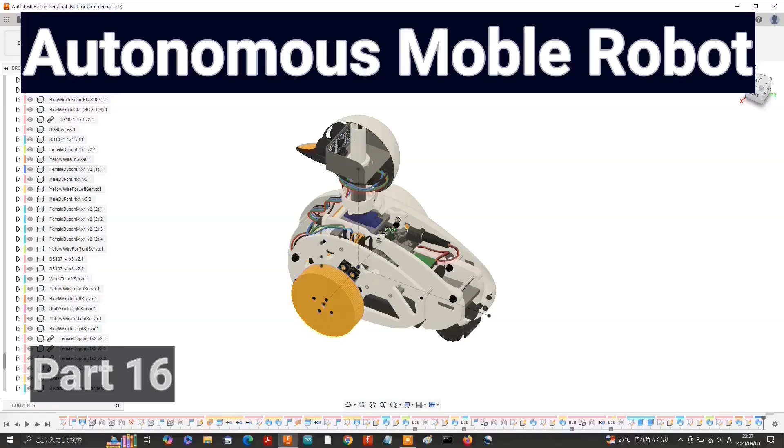Today in part 16 we'll finalize the neck structure. We'll also use the emboss tool to create precise openings.

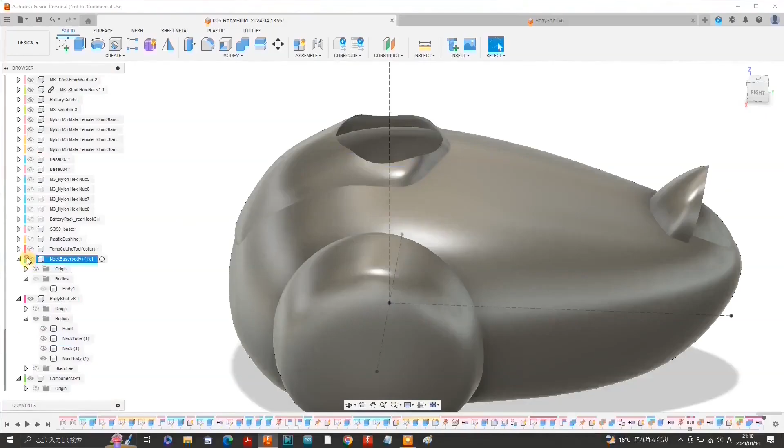Okay, so we might start off by relabeling some of the components because their names might not be so accurate anymore after a number of combining operations. For example, when we hide the component labeled neck base, the entire lower body disappears, so that label will need changing. Also, when we unhide body shell, nothing happens because now only the head and neck components are stored under body shell. Let's unhide the head, the neck, and the neck tube.

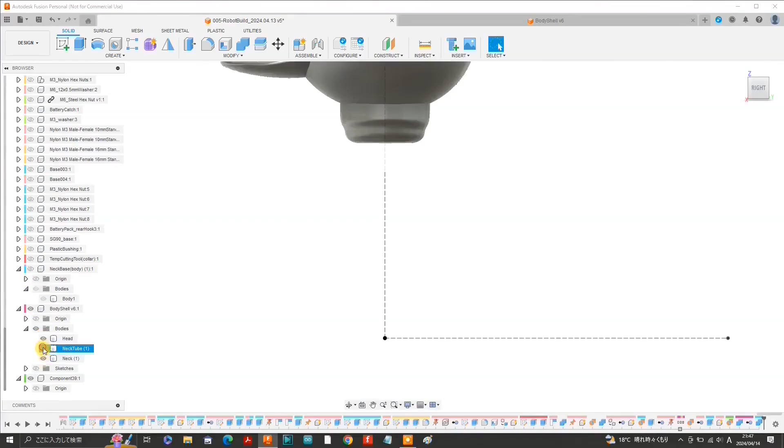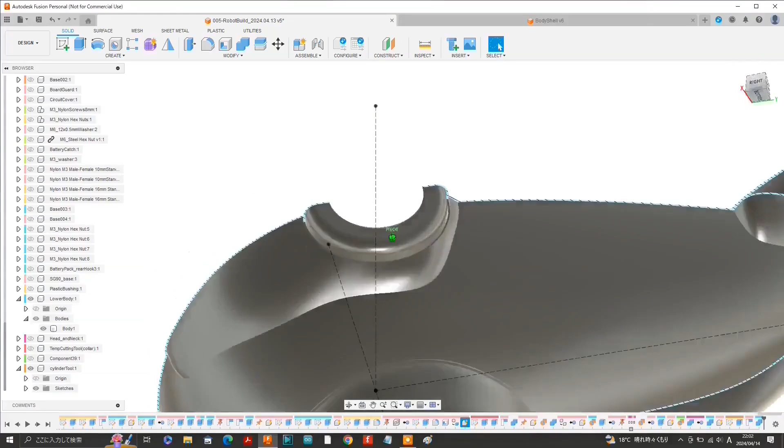Click on body shell and rename this group of components to head and neck. We'll just hide the head and neck for now and unhide the component that is labeled neck base. And let's just rename that to lower body. Here the footage shows a longitudinal section analysis where we can see that the neck base is integrally formed with the lower body shell. Unhide the SG90 micro servo and we can see that the SG90 fits nicely within the neck base.

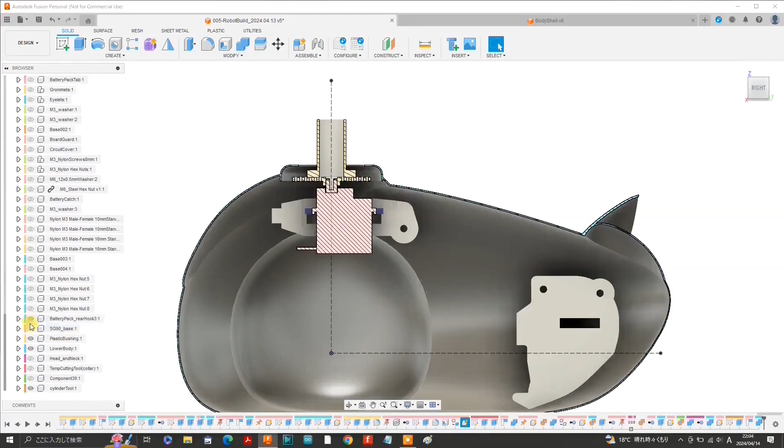Unhide the plastic bushing that is on top of the SG90 servo horn and a few other components like the SG90 base and the battery pack rear hooks 1 and 3. And let's also unhide the head and neck. I'll just hide the section analysis, hide the lower body shell. Now that's the configuration we have at the moment, but it looks as though the neck tube needs to be changed as the servo horn of the SG90 micro servo penetrates through it.

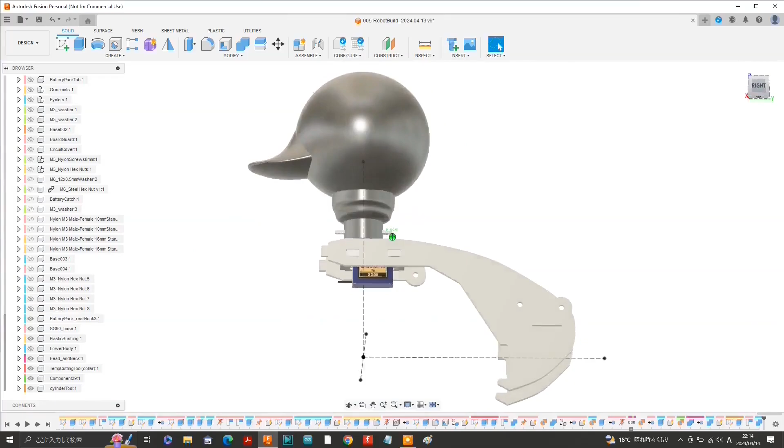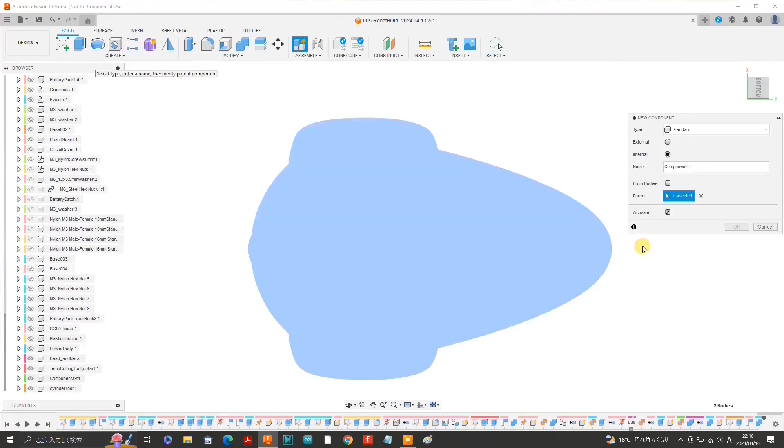Let's hide battery pack rear hook 3, hide the SG90 base, hide the SG90 micro servo, and hide the battery pack rear hook 1. Let's also hide the plastic bushing. The neck tube doesn't seem to be the right diameter or the length for our needs, so I decided to get rid of it. So let's create a new component and label it cylinder tool. Create a new sketch with cylinder tool activated. Select the plane here for the new sketch. Select the circle tool and create a 25mm circle.

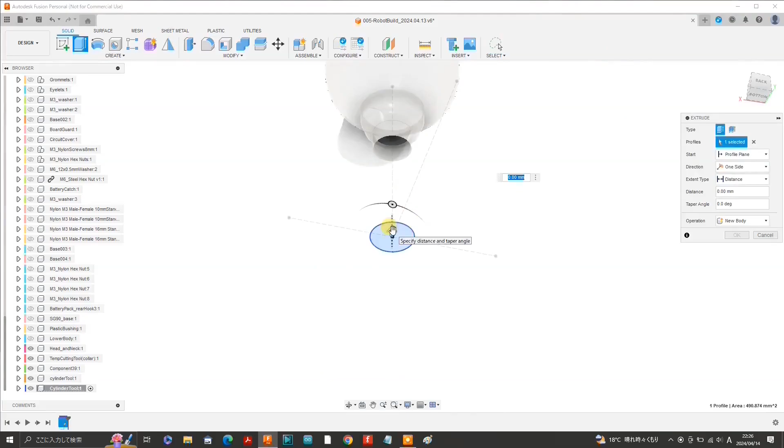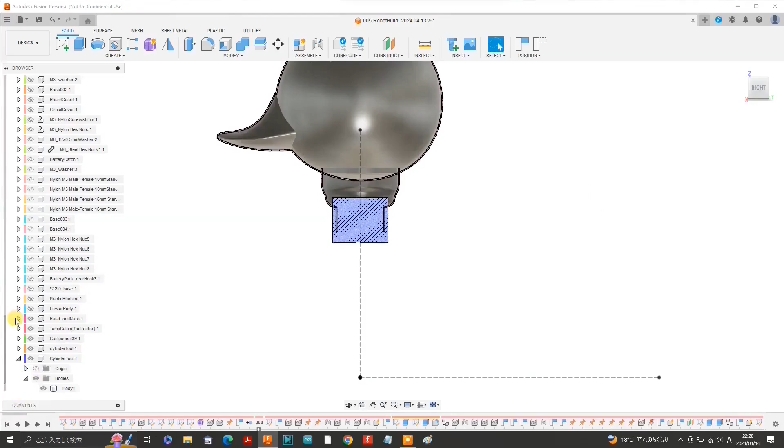So as you can see, this circular plane is positioned at the origin relative to the Z direction as well. Extrude by 20mm and activate the main design at the top of the browser. Turn on the section analysis, select cylinder tool on the browser, and then select the move copy tool to move the cylinder tool upward right into the neck area. Before we conduct a cutting operation, let's open up the cylinder tool folder and then the bodies folder. Let's also open up the folders for the head and neck component. As it turns out, we'll not be needing the neck tube, so let's right click and select remove.

Next, select the combine tool, select capture position, and for the target body, select the neck body in the head and neck component in the browser, and for the tool body, select body 1 under cylinder tool folder in the browser. As you can see in the combine palette, the operation is already set to the cut operation. So hit OK to complete the cutting operation.

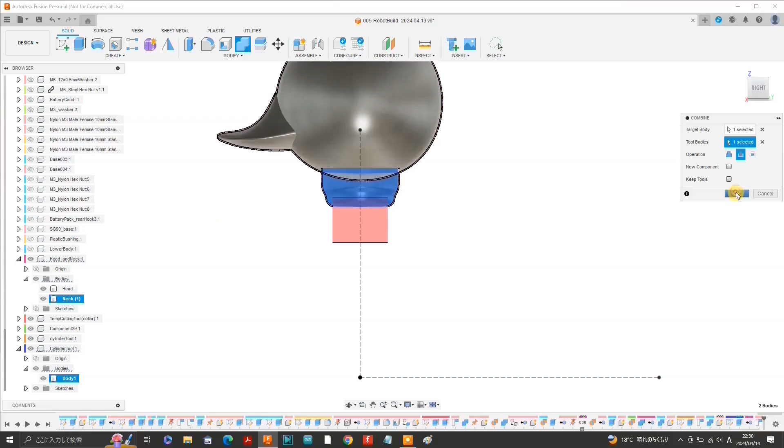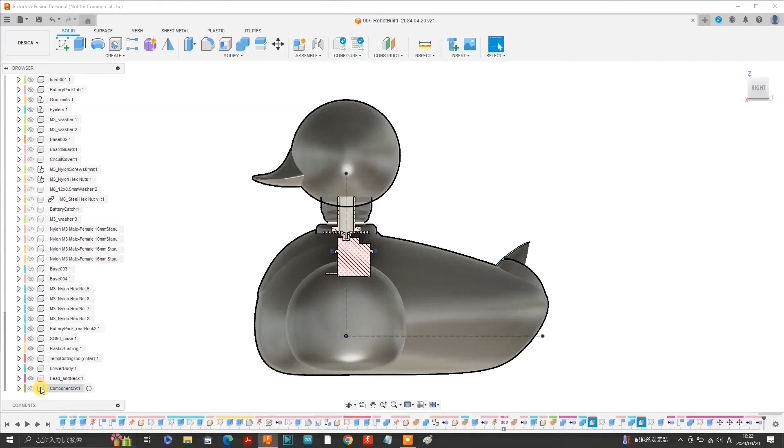Unhide the plastic bushing. As you can see, the plastic bushing interferes with the head body, so we'll need to do something about that. Here the footage has jumped ahead a bit with the lower body unhidden, as well as the SG90 micro servo. I'll just take this opportunity to remove the cylinder tool by right-clicking and selecting remove. This component here, labeled component by default, was used as a tool at some stage, but now is safe to remove, so let's right-click and select remove.

I decided to use a plastic bottle cap to house the plastic bushing while also providing some protection for the wiring.

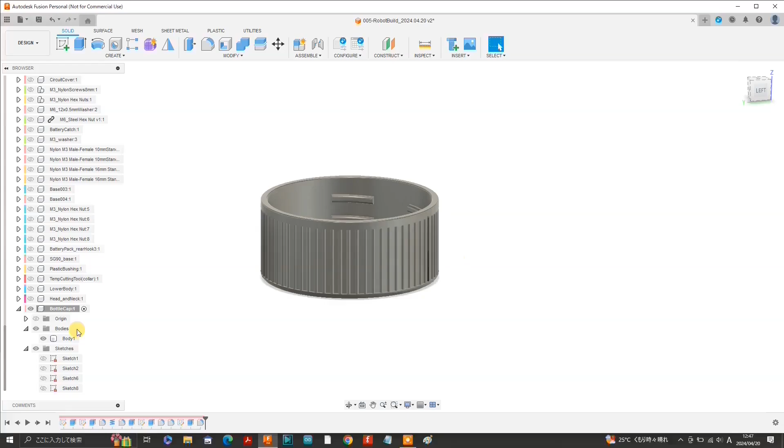So here we have the plastic bottle cap, which I created within this robot design rather than inserting it. Let's unisolate it and activate the main design. Unhide the section analysis to confirm the positional relationship between the bottle cap and the surrounding components. Zoom up and there we can see two issues.

One issue is that the neck flange is interfering with the bottle cap because the hole isn't quite large enough, and the vertical position of the plastic bushing is too low because it is still sitting on top of the SG90 micro servo horn. Scroll down in the browser until you see the plastic bushing, then click to select it. Go up to the toolbar and click the move copy tool.

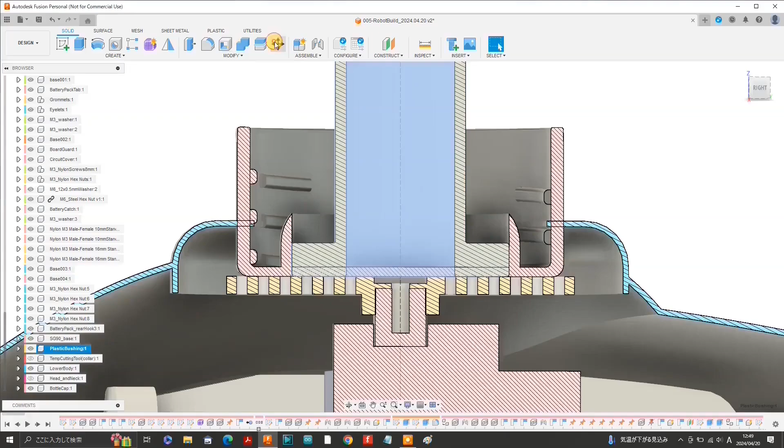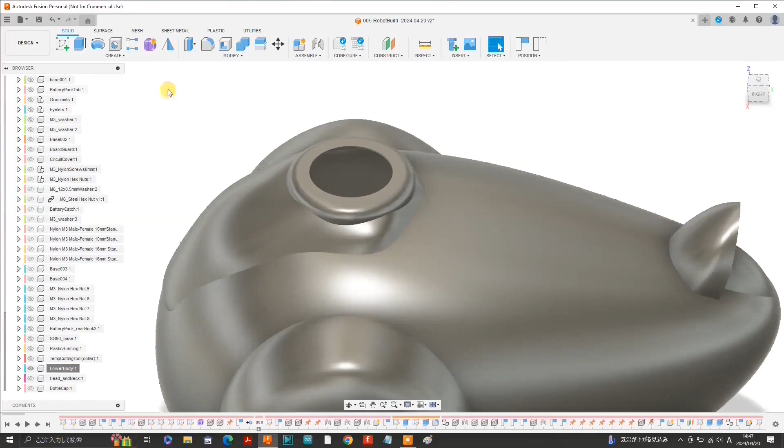Move the plastic bushing upward by 0.85 millimeters, which is the thickness of the plastic bottle cap. Now let's hide the section analysis. Scroll down to the lower body in the browser, right-click on it, and isolate it. So there's the opening, which is a little too small for the plastic bottle cap to fit through. Let's shift to the top view.

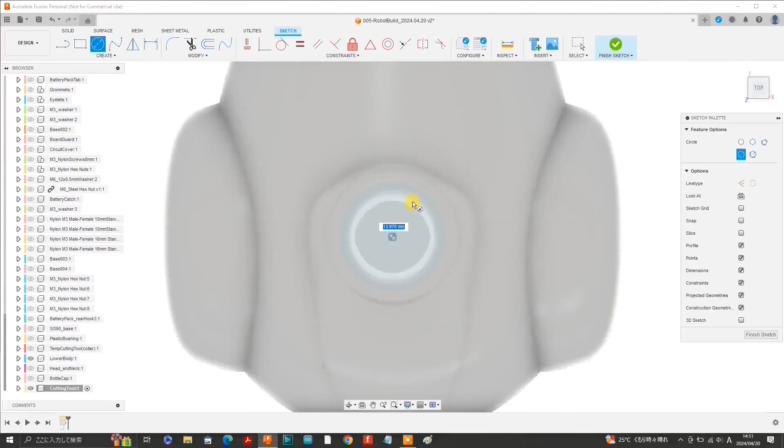From the Create menu, select New Component, and just label the new component Cutting Tool. Select the top surface of the neck flange and create a new sketch. Select Capture Position before we carry on. Select the Circle tool and sketch a 31mm diameter circle, which is 1mm larger in diameter than the plastic bottle cap. Finish the sketch. Tilt the design a bit, select the entire area of the circle we've just sketched, select the Extrude tool and change the direction on the extrude palette to symmetric.

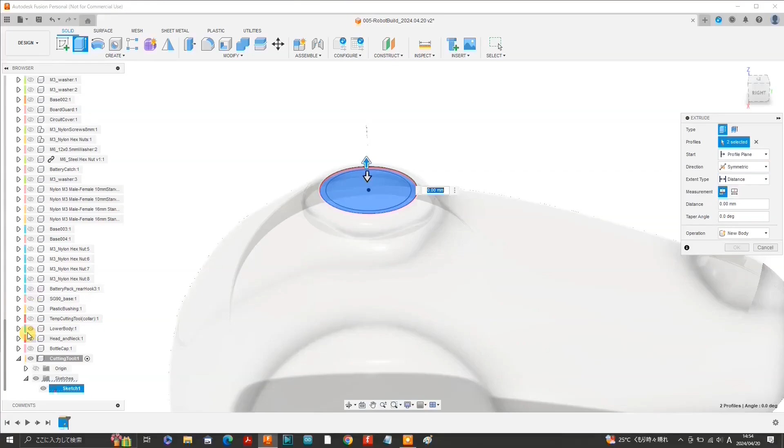Since we'll be cutting in both directions, let's unhide the head and neck component as well. Let's move to the side elevation for better visibility. Here the footage has skipped a little bit where I have activated the entire design and I have changed the operation to cut on the extrude palette. I set the distance to 50mm, which was a bit excessive because it was set to 50mm in each direction, but the cutting tool is not interfering with anything else, so let's just hit OK.

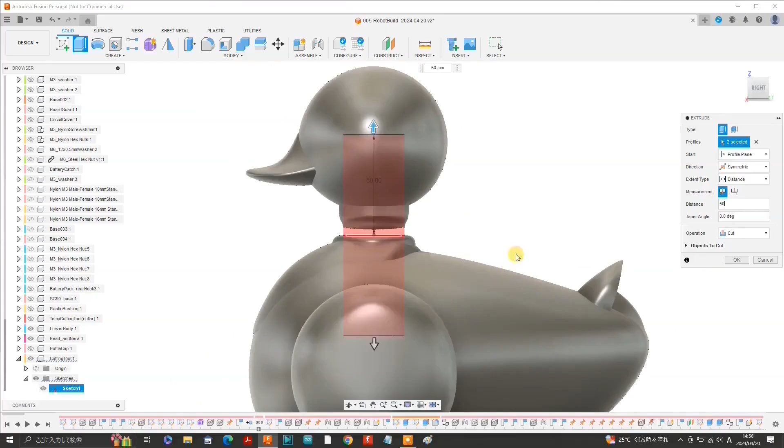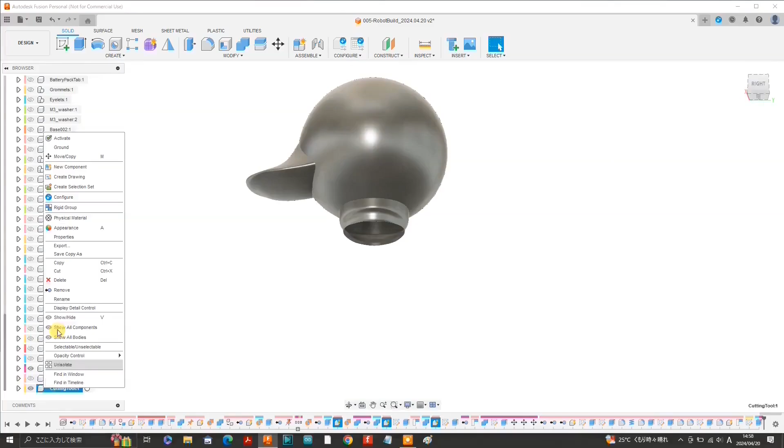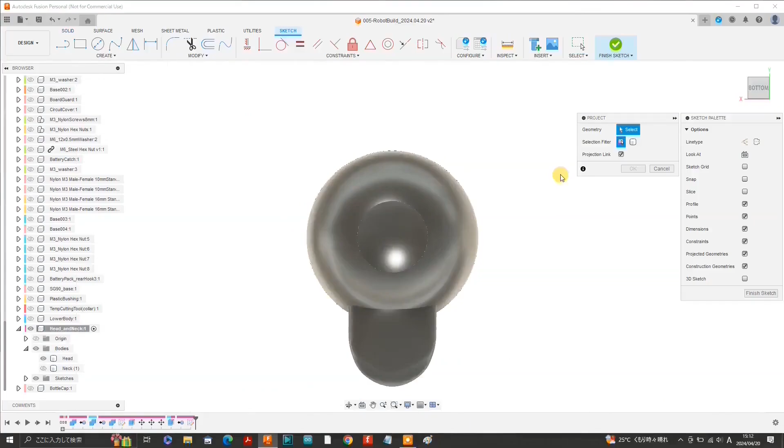Actually, I forgot to activate the head and neck component, so let's do that. Let's click on the canvas, hit bottom on the view cube, create a new sketch and select the XY plane. Press P to project and I zoomed up to the upper edge of the circular opening and selected it. However, since we're on the XY plane, the lower edge of the circular opening would have been fine too. Hit OK and let's go back to the bottom view and zoom out.

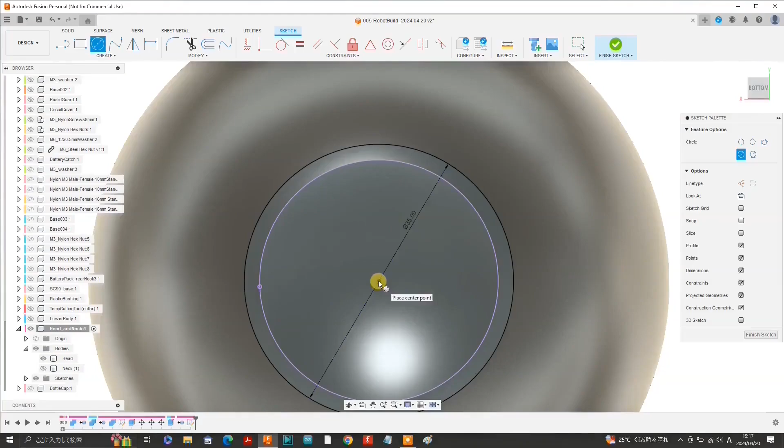Select the circle tool and sketch a 35mm diameter circle. Sketch another circle at a diameter of 31.5mm. Finish the sketch. Now hide the head body. Let's select the extrude tool first. Unhide the head and just reposition it like this. And let's initially extrude up by 15mm. Unhide the sketch we've just created.

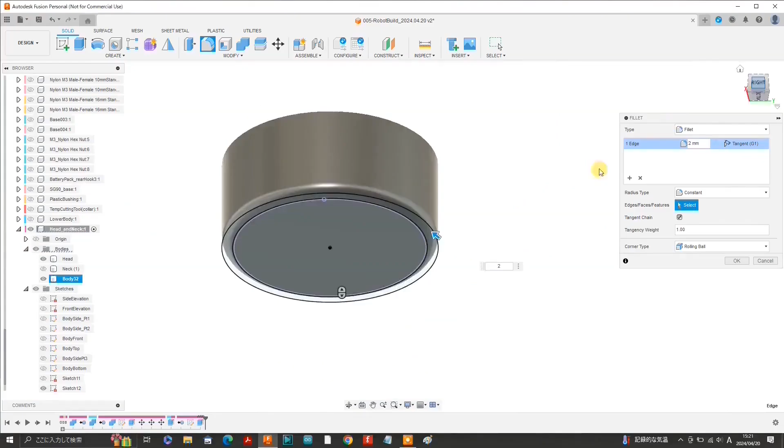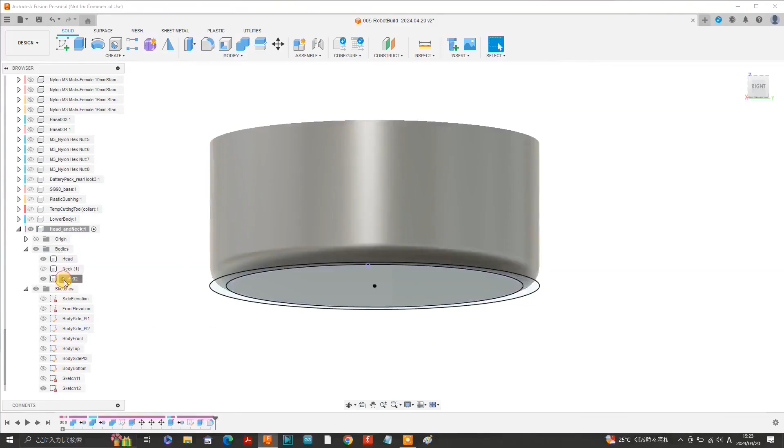Select the fillet tool, select the outer lower circular edge of the cylinder we created and set the fillet to 2mm. So a 2mm fillet makes the rounded edge arrive at the projected 31mm diameter circle, not the 31.5mm diameter circle we sketched. I ended up not wanting a tighter curve than that, so I went with the 2mm fillet rather than a smaller one. Let's name this body upper neck, unhide the lower body.

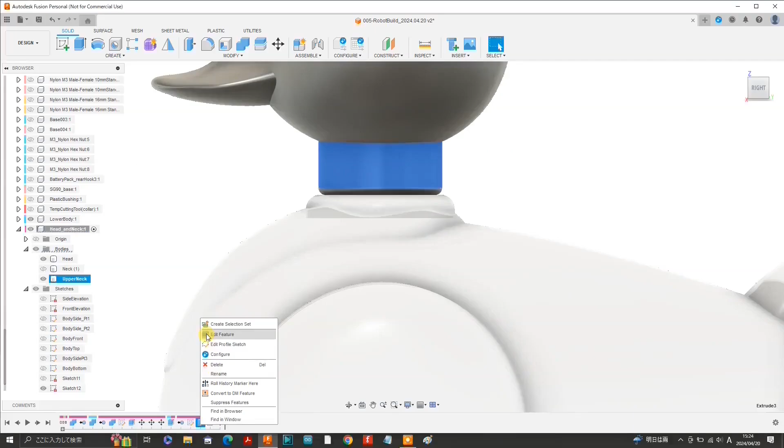The upper neck is currently positioned at the origin, so select the Move Copy tool and move it up to the head. Okay, it looks as though the height of the upper neck is too tall, so hit OK and go to the timeline and edit the extrude feature by right-clicking and selecting Edit Feature. Let's change the extrude distance to 11.5mm and hit OK. Select the upper neck in the browser and select the Move Copy tool. Move the upper neck up to the head and hit OK.

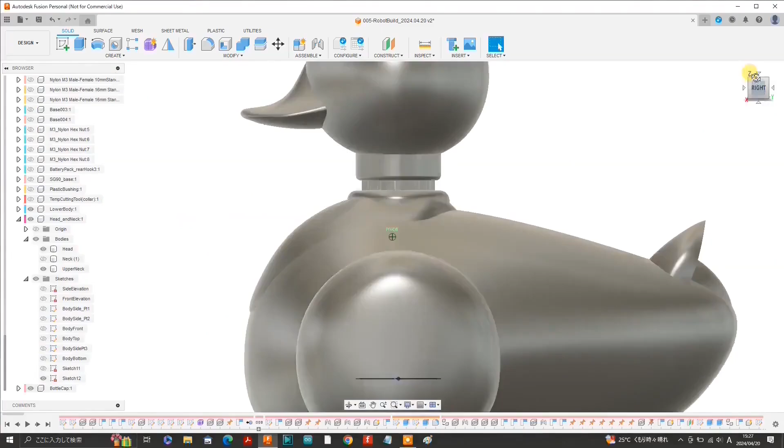Activate the main design. Let's scroll down the browser and unhide the bottle cap. Let's zoom in. At the moment there is no hole in the upper neck, but I think you should be able to tell that the bottle cap fits nicely within the 31mm diameter hole that will be formed. Hide the lower body, hide the bottle cap, and hide the head. We can also hide the sketch. Now from Create, create a new component and label it Cutting Tool.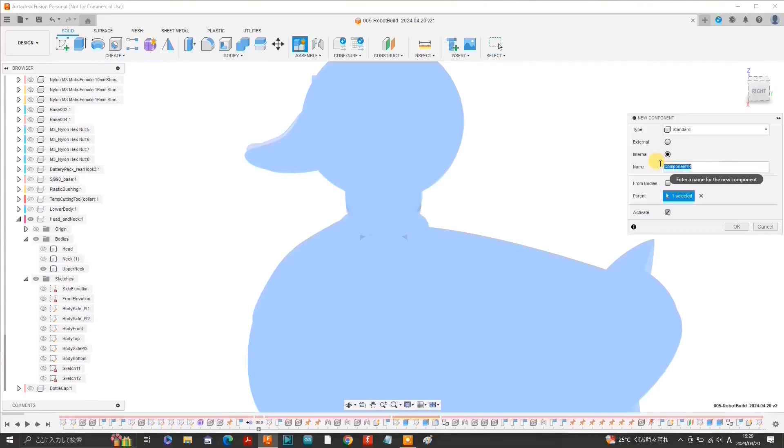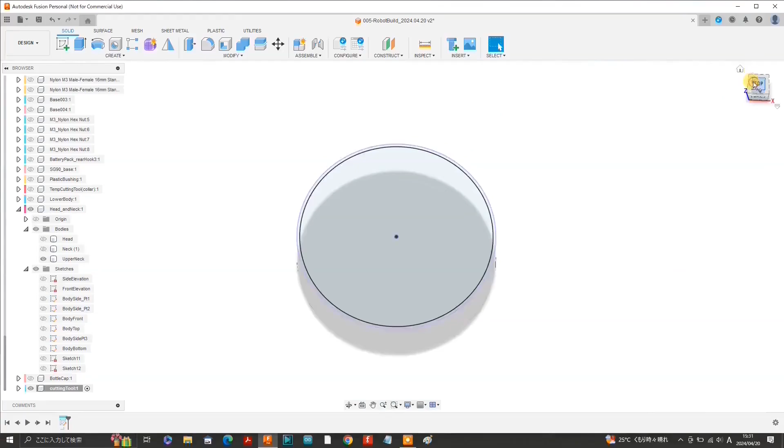Select the top face of the upper neck component and create a new sketch. Zoom up a bit and press P to project. Select the entire circular face of the upper neck body and hit OK. Select the circle tool and sketch a 34mm diameter circle and finish the sketch. Hide the head and neck component. Select the area defined by the 34mm diameter circle we have just sketched. Select the extrude tool and extrude by -11mm, which is 0.5mm shorter than the height of the upper neck.

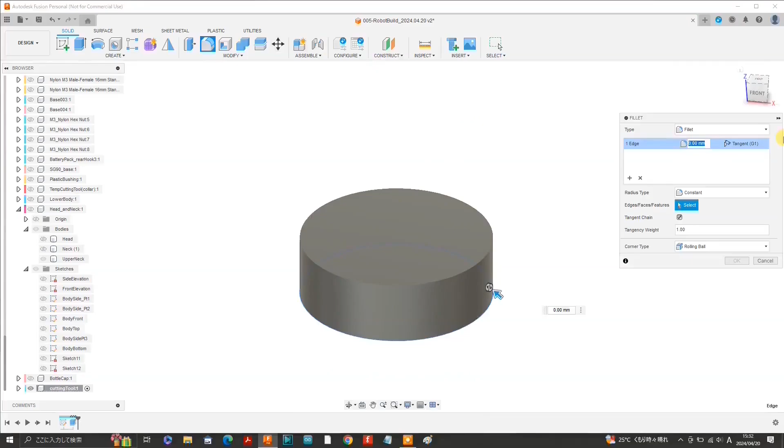Then go and select the lower circular edge and select the fillet tool. Create a fillet of 1.5mm. Let's extend the top of the cutting tool. So select the extrude tool, select the top face and extrude by a further 5 millimeters. In the footage, I unhide the head and neck component, which is currently only the upper neck component, though it is the cutting tool that is currently activated.

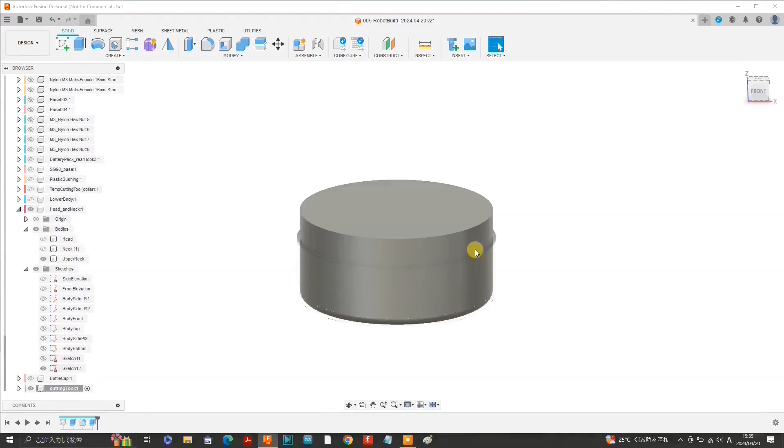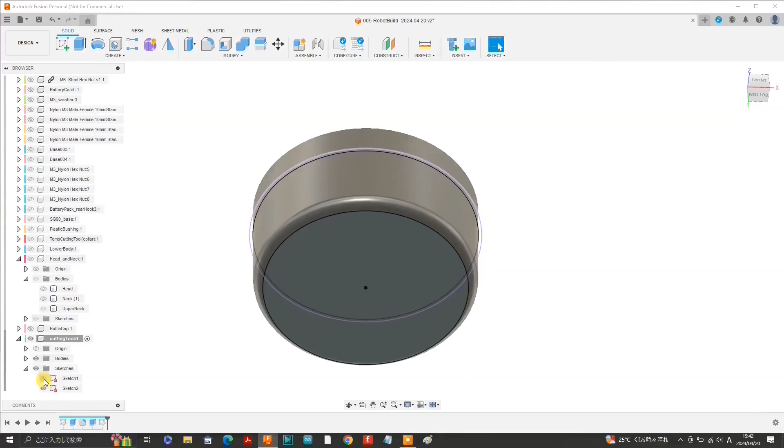Swivel the cutting tool so that we can see the underside. Select the underside. Here the footage has jumped ahead a little with the cutting tool at the bottom view. Create a new sketch. Select the circle tool and sketch a 31mm diameter circle. Here the footage has jumped ahead a little again with the sketch finished but still showing the 31mm diameter circle.

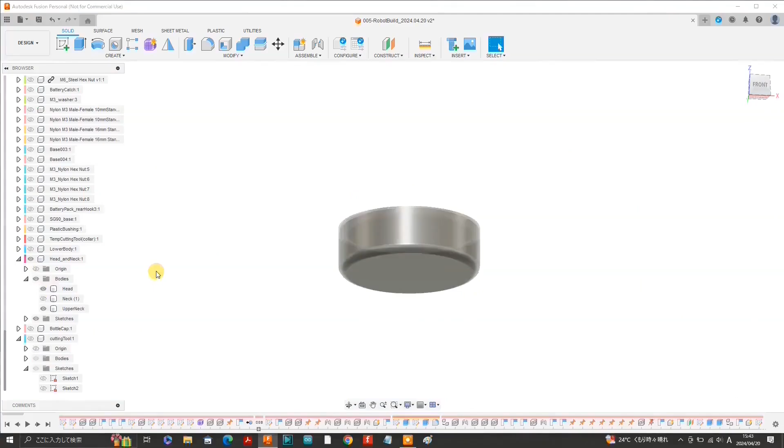Select the underface, select the extrude tool, extrude the 31mm diameter circular area by 0.5 millimeters, and there we have a 0.5 millimeter thick circular protrusion. Hide the cutting tool for now. Scroll up to the top of the browser and activate the main design. Unhide the upper neck and unhide the head also. Now scroll up to the section analysis and unhide that too. As you can see, the upper neck is still completely solid, but the vertical position is fairly good.

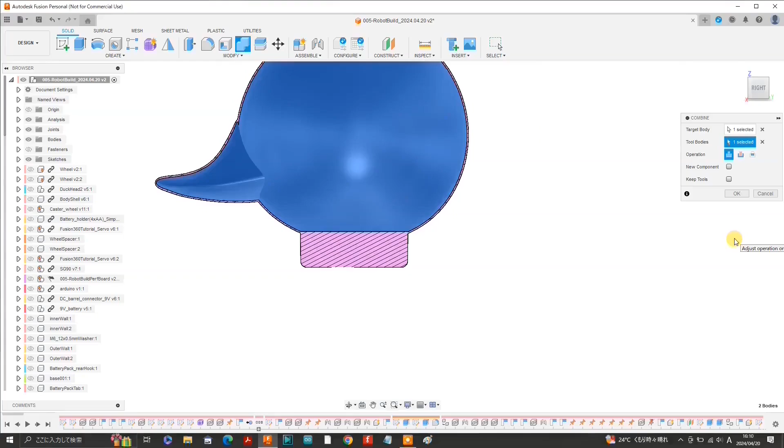Select the combine tool. Here the footage has jumped ahead a little bit. In the combine palette, you can see that a target body and a tool body have been selected for a join operation. So the head is selected as the target body and the upper neck is selected as the tool body, or vice versa. Now scroll down to the cutting tool and unhide it. Select the combine tool again, select the head as the target body and select the cutting tool as the tool body. We also need to change the operation to cut.

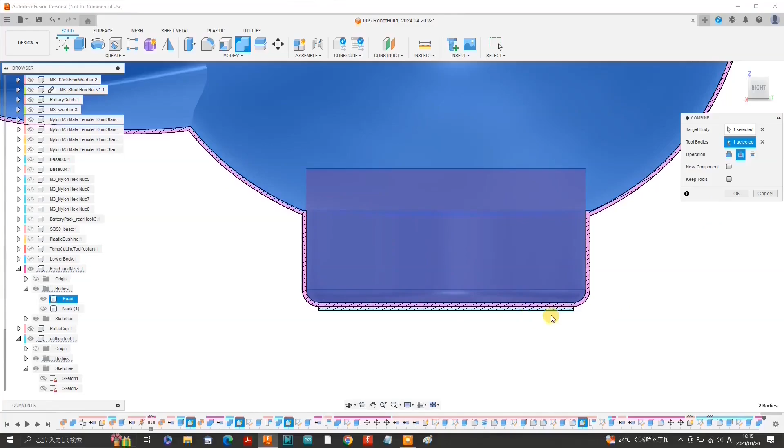I can see that I have mistakenly extruded the 0.5 millimeter thick circular boss on the underface of the upper neck instead of the underface of the cutting tool. I think the easiest way to fix that problem is to first finish the cutting operation using the combine tool by hitting OK, and then go to the 0.5 millimeter thick circular boss, select it, select the move copy tool and move it up by 0.1 millimeters. Hit OK or press return and then select the combine tool again.

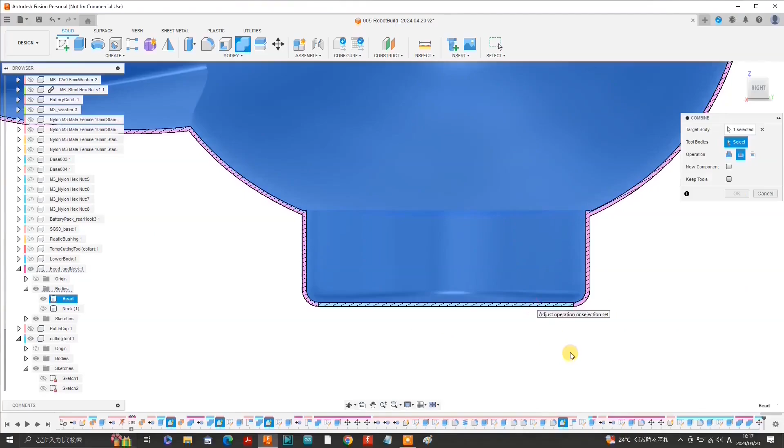Select the head, which is integral with the upper neck now, as the target body, and select the 0.5 millimeter thick circular body as the tool body. Hit OK and hide the section analysis. Swivel the design to see the underside, and there we can see a nicely formed upper neck, integral with the head and with a 31mm diameter hole at the bottom.

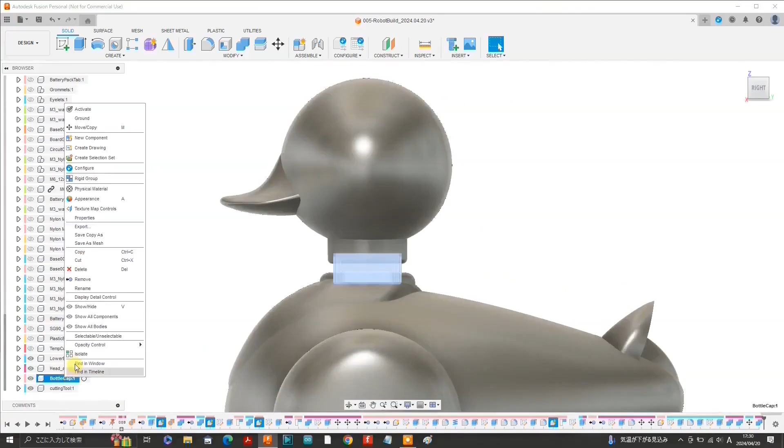Unhide the lower body and then unhide the bottle cap. Isolate the bottle cap, press A for appearance and color it white. If you download a bottle cap from my GrabCAD account, it will already be white. Unisolate the bottle cap to bring the head and neck and lower body back. Unhide the section analysis, and there we can see the bottle cap with sufficient clearance from the neck flange on the lower body and from the upper neck of the head and neck component.

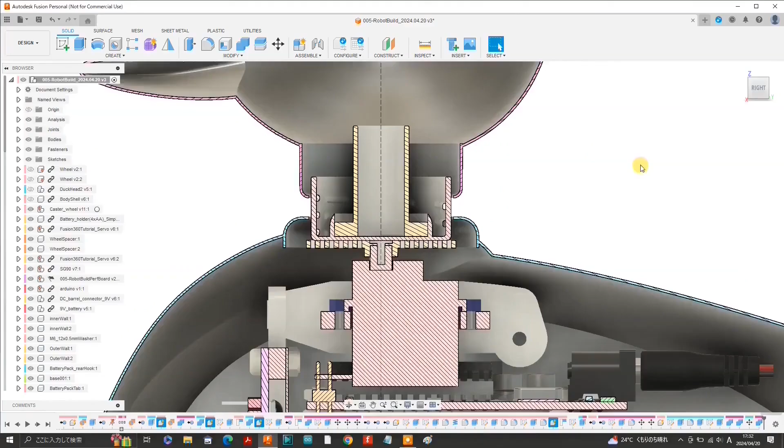I think it was at this stage I realized that the direction of the servo horn shouldn't be in the forward to rear direction, but in the left to right direction, because we don't want the servo horn to interfere with the wires that are connected to the HC-SR04 ultrasonic sensor. So here the footage has jumped ahead a little with the section analysis switched off. Right click on the SG90 and isolate it. This SG90 has been downloaded from GrabCAD, so here I have opened the file for this component, separate from the file of the main design.

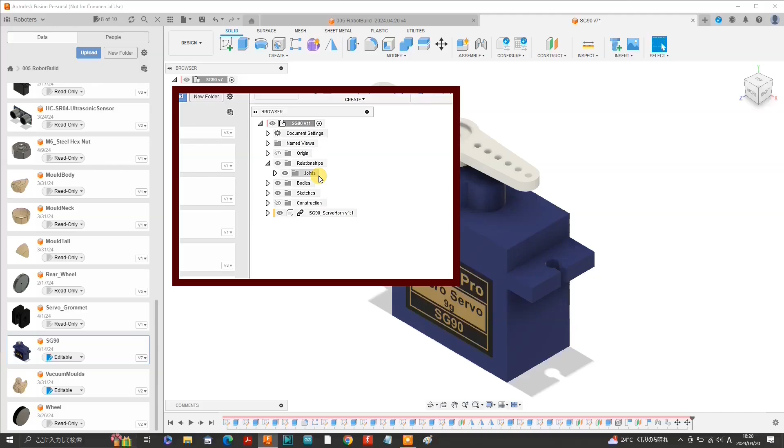Open up the joints folder. Please note that in the latest version of Fusion 360, the joints folder is now a subfolder inside a folder called relationships. This footage was taken before that update. Right click on Revolute and select Edit Joint. Enter 90 to adjust the angle of the servo horn to 90 degrees. Hit OK or hit return.

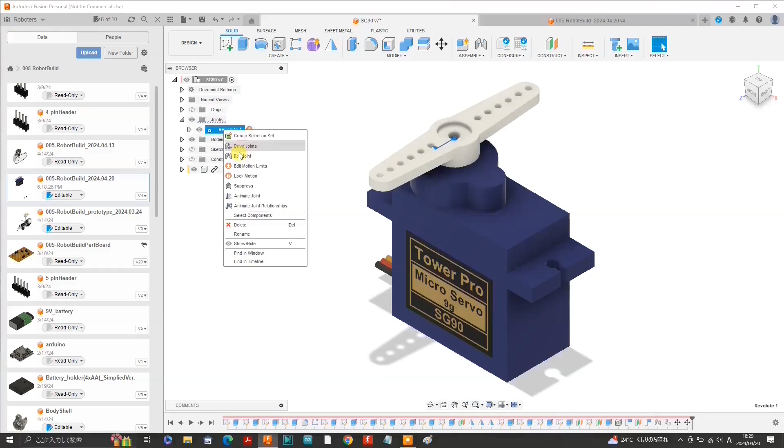Then go back to Revolute again, and this time right click on Animate Joint Relationships to check the movement range. There we can see the servo horn is rotating to the right by 90 degrees and to the left by 90 degrees and is positioned at the lateral position or left to right position when stopped. Close the SG90 file and return back to the main design.

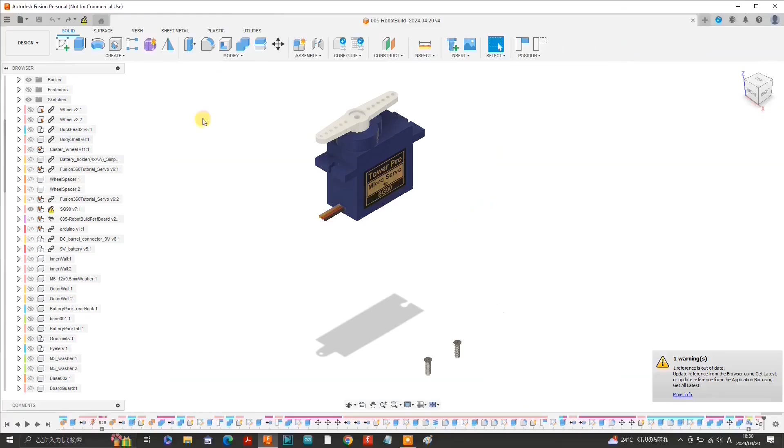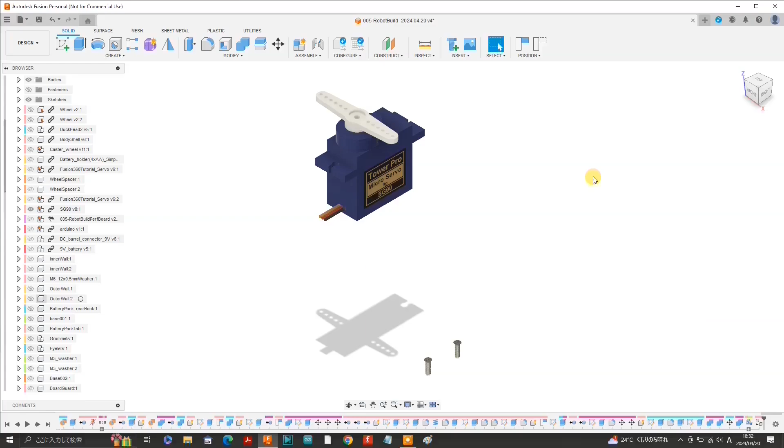Now we have a warning saying that the reference is out of date, so we can just right click on the SG90 in the browser and select Get Latest Version, upon which Fusion 360 commences to update the SG90 in relation to the other components, which may take a while because we have created a large number of components in this design. Anyway, there we have the updated SG90 micro servo with the servo horn in the corrected position.

Select the SG90 in the browser, right click and unisolate it. Go to section analysis, and here we already have a left-right cross-section, so let's just unhide that. There we can see the servo horn in the left to right direction or lateral direction.

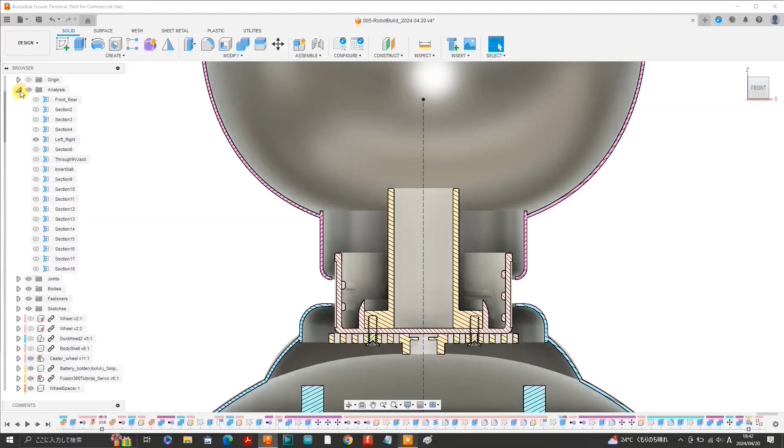Just ignore the screws there, as I will use a different size and type, which I will detail in a future video. Go to the section analysis again and switch to the front-rear cross-section, and obviously now we can only see the central portion of the servo horn from this cross-sectional direction. We can hide the section analysis now. We can safely remove the cutting tool that we used to form the upper neck portion.

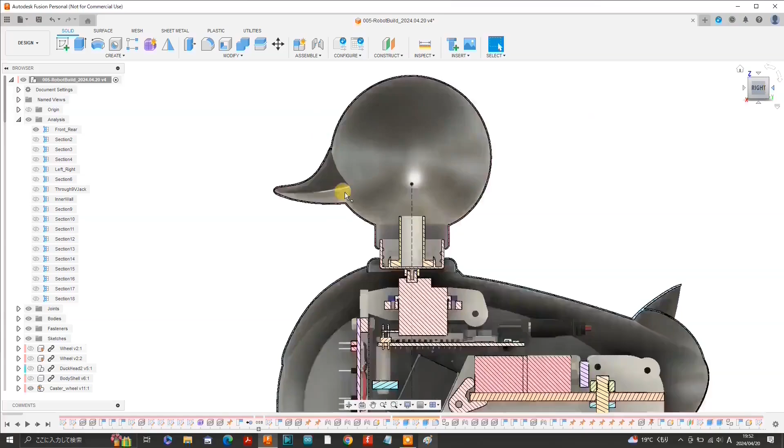Anyway, select the front to rear section analysis, and here in the data panel we have an HC SR04 ultrasonic sensor which I downloaded from GrabCAD. You should be able to locate a good 3D design by searching HC SR04 in the library and selecting Fusion 360 under the software option. I think this is the one I downloaded a while back. Right click the downloaded HC SR04 file in the data panel and select Insert into Current Design.

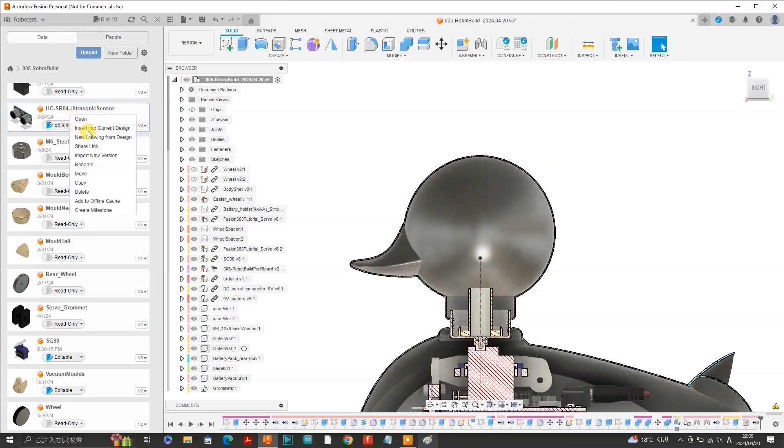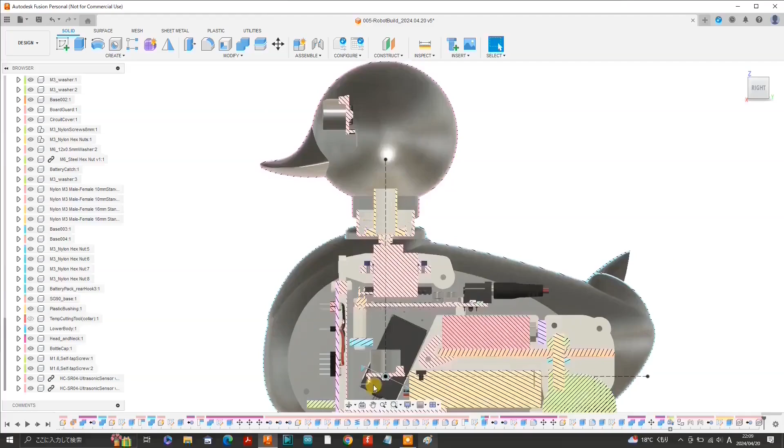Move the HC SR04 up to the inside of the head component. Rotate it forward by 90 degrees. Play around with the position to find the most natural position for this component. Hit OK. Let's close the data panel. Somehow I've managed to insert two HC SR04 ultrasonic sensors, so I'll just remove one of them. I'll just adjust the position of the HC SR04 a little more.

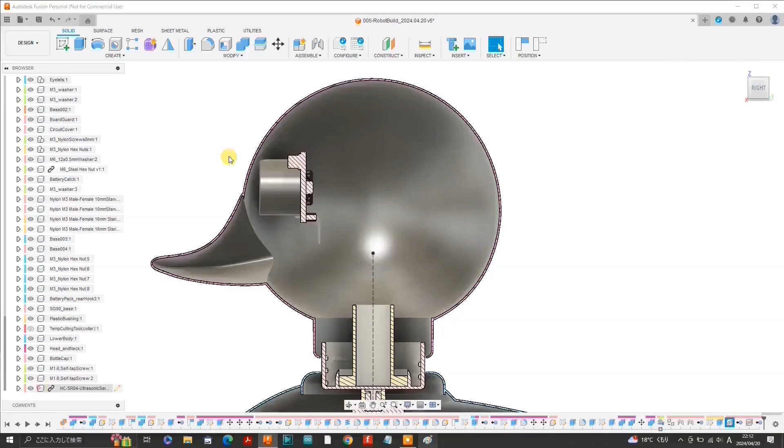Let's rotate the design to the front view. The circle of the HC SR04, which gives the appearance of an eye, looks a little too low and too close to the beak. So let's move the HC SR04 up a little, and it looks about right. We need to work on the head, so let's activate the head and neck component. Before we carry on, let's remove the old version of the neck.

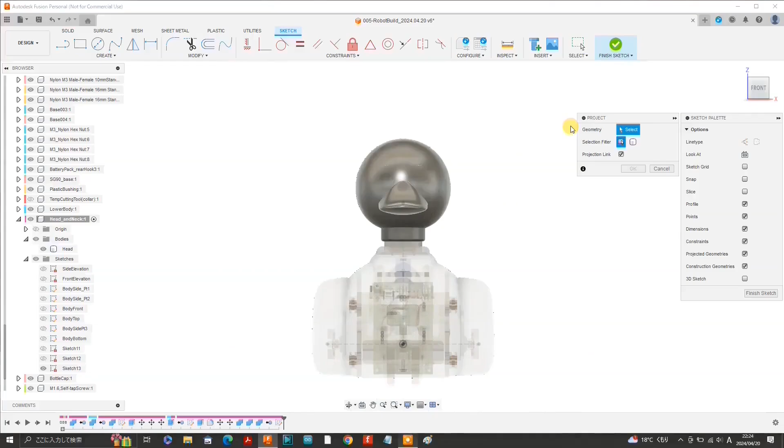So with the head and neck component activated, select a new sketch and select the YZ plane. Select Capture Position. Press P for Project. Project the vertical center line. Zoom in and select the cylindrical transducer on the right side of the HC SR04, which appears on the left side of the canvas, and then select the cylindrical transducer on the left side of the HC SR04, which appears on the right side of the canvas.

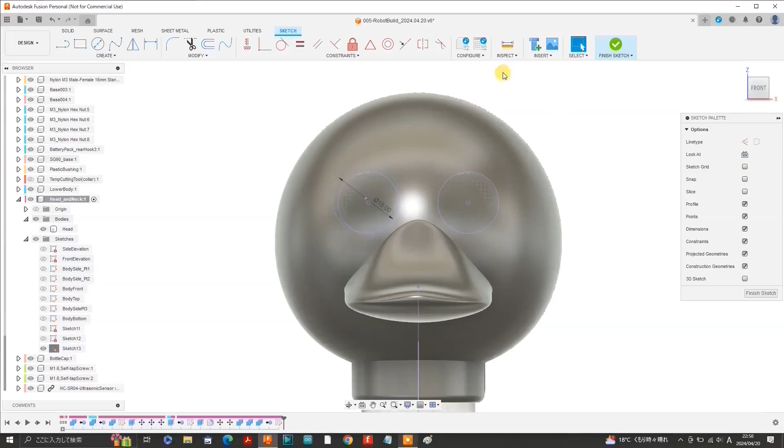Select Measure from Inspect and measure the diameter of one of the projected cylindrical transducers, and we get a diameter of 16 millimeters. Select the circle tool and sketch a 21 millimeter diameter circle at an arbitrary position on the canvas. Then drag the 21 millimeter diameter circle to approximately where the eye opening of the head should go. Let's change the diameter of the circle to 18 millimeters and see how that looks. Select the concentric tool and make the 18 millimeter diameter circle concentric with the 16 millimeter diameter projected circle. I experimented with different sized eye openings and I finalized on a diameter of 22 millimeters.

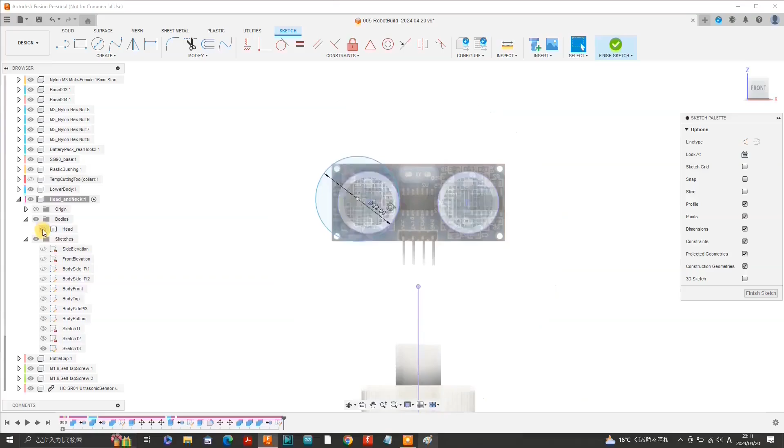Hide the head to get a better view of our sketch and also hide the HC SR04. Select the line tool, change the line type to construction and sketch a vertical construction line from the top of the projected center line. Let's give this vertical construction line a length of 24 millimeters. Select the dimension tool and set the distance between the center of the 22 millimeter diameter circle and the vertical construction line to 16 millimeters. Now the sketch is constrained.

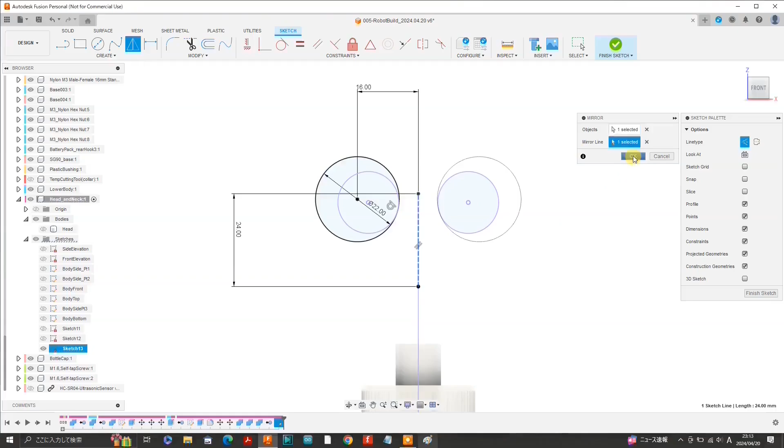Now we can easily mirror this right eye opening to create a left eye opening by selecting the mirror tool, selecting the 22 millimeter diameter circle as an object, and selecting the vertical construction line as the mirror line. Finish the sketch. We can unhide the head now.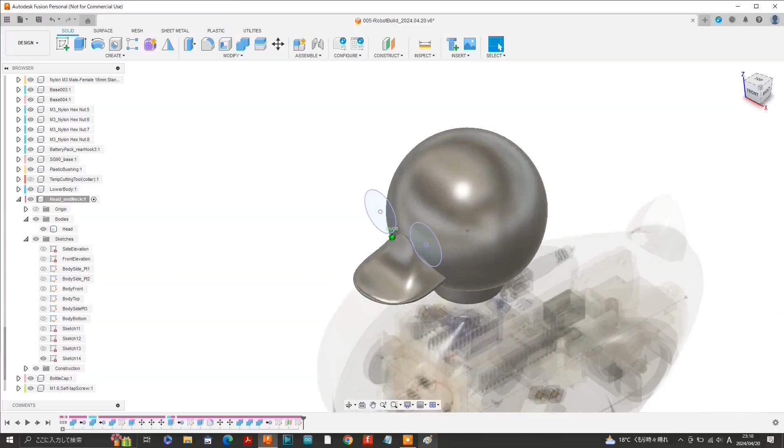The footage has jumped ahead with a new sketch 14 created, onto which the 22mm diameter circles have been projected. The really important thing to note here is that the plane on which sketch 14 lies has been offset forward from the center of the head so that it lies outside of the head. I would have used an offset plane from Construct to achieve this, but unfortunately I did not capture the footage for this operation. From Create, select Emboss.

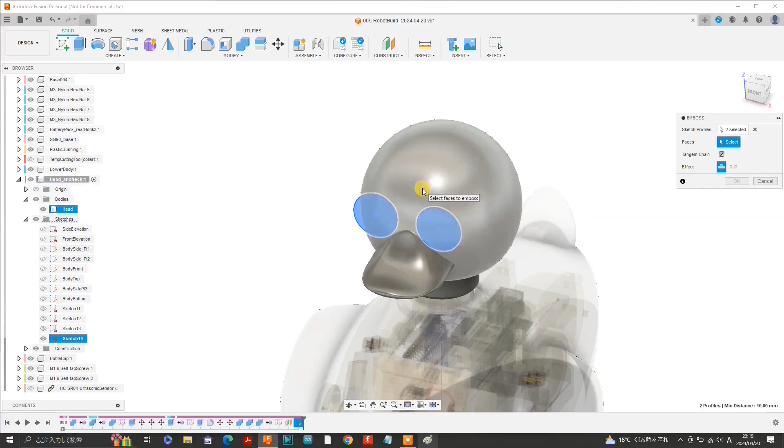Select each area defined by the 22mm diameter circles. Then select Faces on the Emboss palette, and then select the surface of the head. The depth of the emboss is set to the default value of 2mm. Let's change that to minus 0.5mm, and also we need to make sure the effect is set to deboss. Hit OK, and there we have the two eye openings perfectly formed.

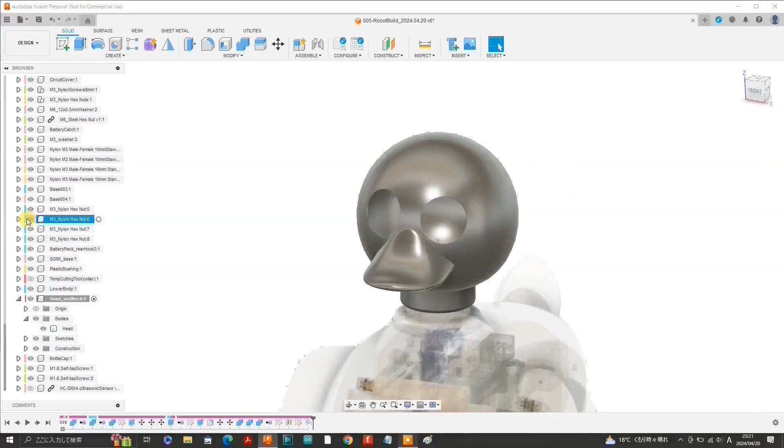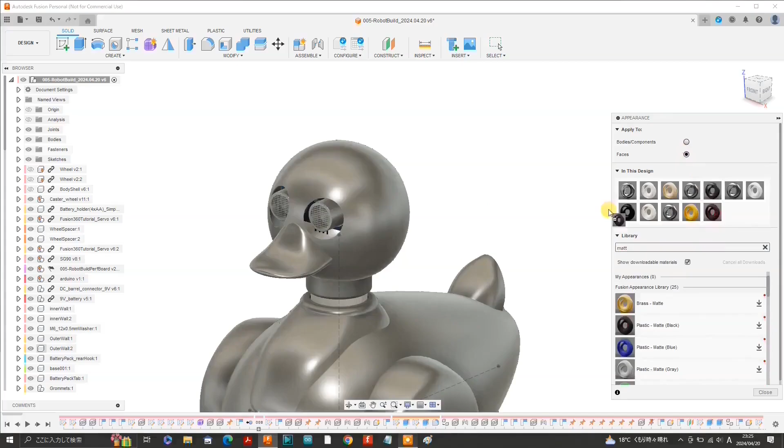Unhide the HC SR04 ultrasonic sensor and activate the main design. There we have two eye openings, which will allow the left and right transducers of the HC-SR04 to operate properly. I intend using black matte colored tape on the outer cylindrical sides of the transducers, so let's color them matte black by pressing A for appearance, using the keyword matte. Grab a matte black color, select faces, and color the transducers matte black.